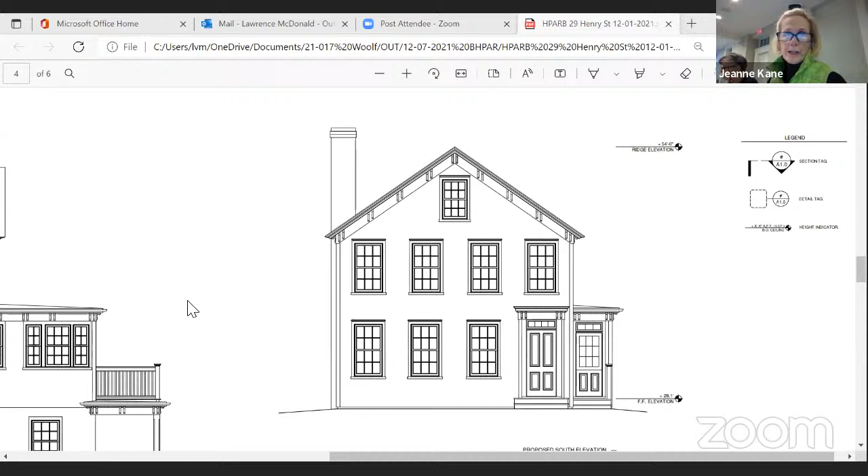Agreed, yep, it looks very nice. Thank you. So we thank you for making those changes and for working with us. If everyone feels comfortable with the changes.

I have a question. Sure, Kristen. I know that there was a different architect on this job originally. I just want to know if this job still conforms to the area variances he received from the previous architect. That's right, yes it does. Okay, great. Any other questions, anyone?

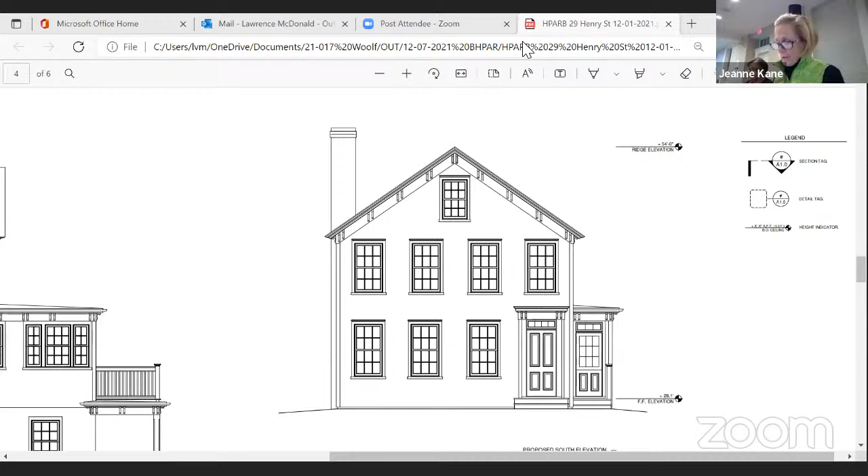So we could make a motion to approve 29 Henry Street. I'll make that motion. I'll second. All in favor? Aye. Okay, great. Thank you, Mr. Lawrence. Thank you very much.

Great, so we will continue now. If we could do 207 Main Street.

Mr. Chairman, this is Dennis Downs. Can you hear me? Yes, Dennis, we can hear you now. I think on the line also is Mr. Coy from the architect's office. So, Chris, could you just go through the changes that we made as a result of last month's meeting?

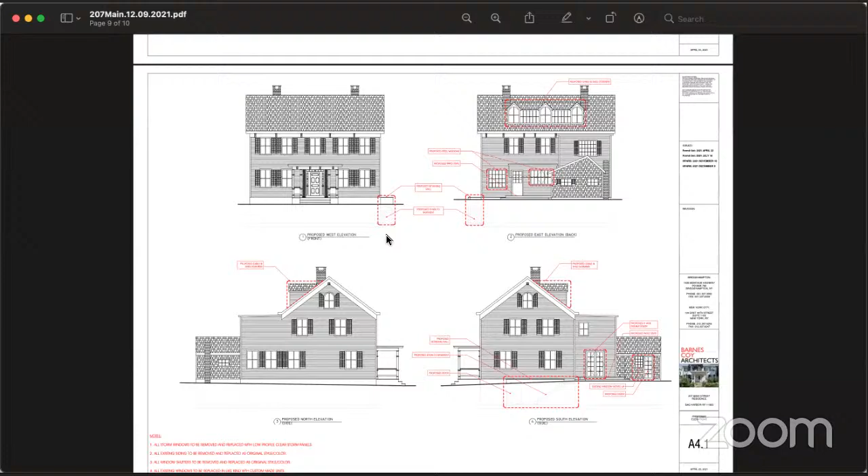Yes, of course. Good evening, this is Chris Coy, Barnes Coy Architects. We're going to put up the elevation on the screen. There was some discussion at the last hearing of the dormers on the front of the house. So you can see on the proposed west elevation, the Main Street elevation, we have removed those dormers altogether with the permission of the owner. So he's agreed to forego those dormers.

And there was some other request to draw the front door exactly as it appears. So that front door is now accurately drawn. That's the door that's there.

Then around the back, the proposed east elevation, we have a new dormer there, which is a combination of shed dormer and 3 gable dormers. That was deemed to be a little high, so we lowered it down. We not only lowered it into the roof so that the sill height is closer to the finished floor in the attic, but we lowered the height of the dormers as well. So this is the appearance now, and it's well below.

I think the discussion was that the dormer ridges of the new windows were at the same height as the main ridge, and now you can see that the dormer ridges are well below the height of the main ridge.

That should solve that. And I think those were the main comments.

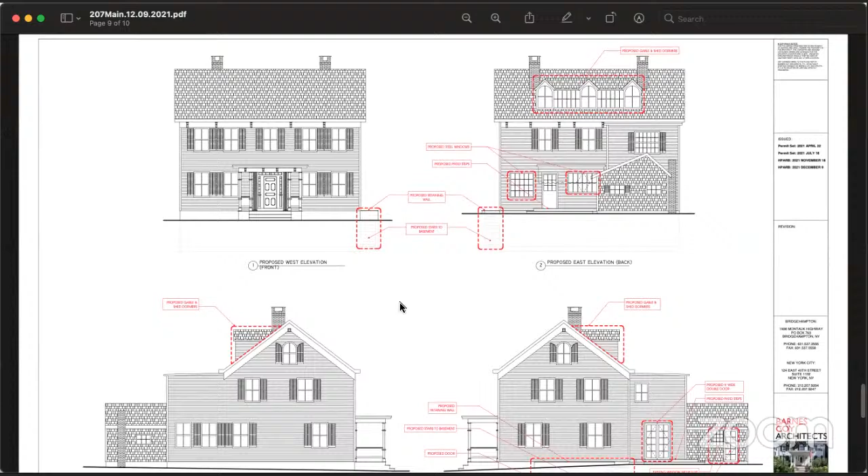Then we also were talking about the windows. Let's put up the drawing of the windows. So what we did, and you remember last time Zach was weighing in on this, we're proposing to replace all the existing windows with custom-made copies, because the existing windows are physically shot. They leak air, they rattle, they don't open and close. So we're proposing to have them rebuilt by Michael Riley Architectural Windows, and we have a representative with us tonight, Jeff Cummings.

We had the builder physically remove one of the windows, and there you see the photograph in the lower left, that's in our design studio here in Bridgehampton. So we were able to make a very accurate survey of it and measure it, and those are the drawings you see. On your left are the existing windows, elevation and section, and on your right are the proposed, which is an exact copy.

So we've already been in discussions with Michael Riley Architectural Windows through Jeff Cummings, who's on here tonight if you need to ask him any questions. This is something they do, and they're quite used to reproducing historic windows.

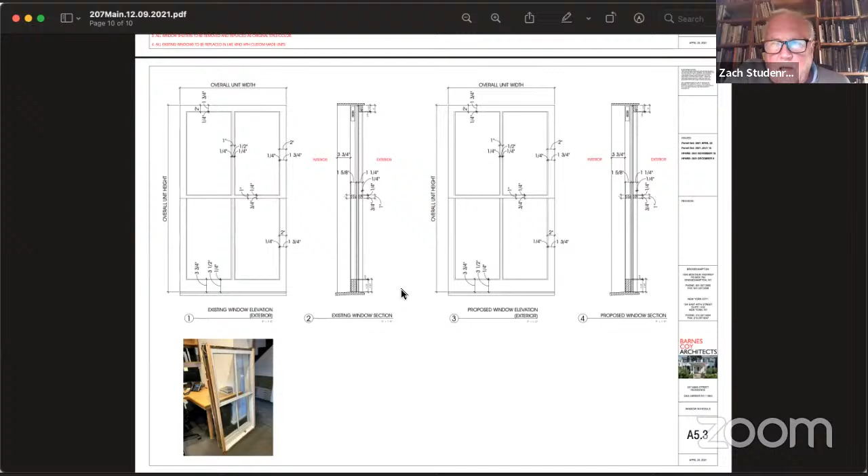I think the depth of your muntins has to be such that it will receive these insulated panels, which are certainly thicker than a single pane of glass. Yes, correct, the depth of the muntins would have to increase, but the sight line, which is shown in the elevation, would not increase. Okay.

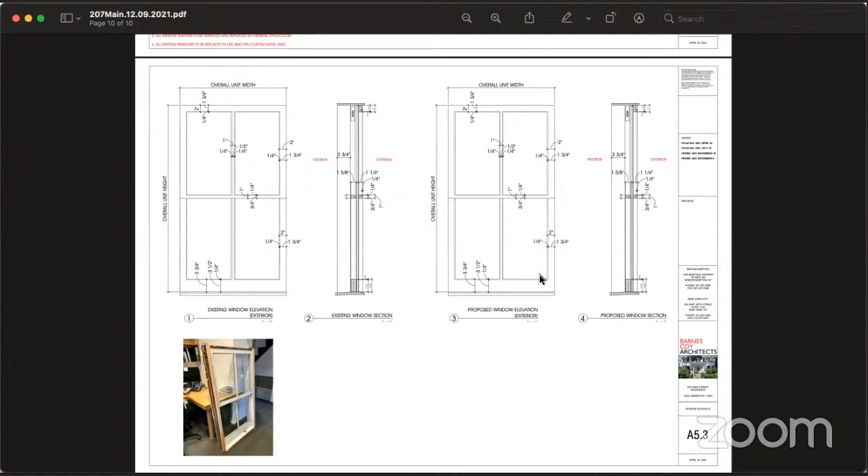Chris, I'm not sure if it would be helpful, but I do have the picture that I shared with you of the unit that we did build for the project in Nantucket. That was certainly the same historical replication of a unit. I don't know if that would be helpful for the board to see. I can certainly, should I share that? Yes, please.

I could have the sample sent to you if you needed to see it, but it's pretty large and substantial for the conversation. But at least this shows you what we do. Every unit that we build is a custom product, and we do have the flexibility to adjust these profile sizes to match existings.

I have a question. Is this modification consistent with the Secretary of Interior's directives? I think there's some area of interpretation there.

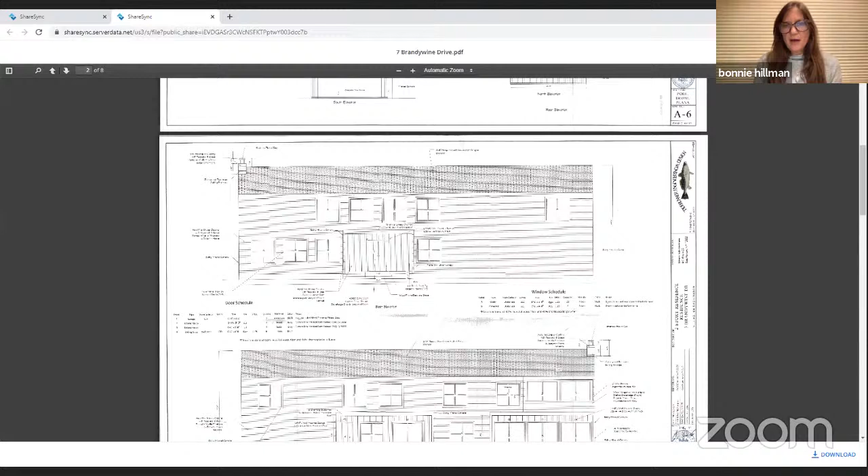You do want those areas to be vertical. Yes, around the sliding doors and around your front door and your rear door and for your pool house. Right, but for some reason this picture is not coming through on mine. I don't know if you guys can see it on yours. We can see it. Okay, so yes, so the house will be horizontal, and just inside the shadow box around the door will be vertical. Okay, and your pool house will be vertical. Yes. Okay, I just wanted to be clear on that, since that was one of the major issues that we had to address.

Yes, and then the number of windows that you're gonna have, you now know what they are. You're gonna have in the rear, or excuse me, in the front, you're gonna have 4 on the top, basically over the door, and then 1 over to the side, yes, single window. And then on the first floor, you're gonna have 3 as you are facing the door to the left and 1 on the right, and you're not gonna be adding any additional windows. This is gonna be it.

On the rear, you're going to have a total of 5 on the second floor. Were the vertical ones around the balcony added? No, those were always there—those are doors. But you added windows onto the sides of the balcony. Oh, those aren't windows, they're just openings, cutouts. Is it fixed glass? No, it's just open air. Okay, that's the clarity we needed.

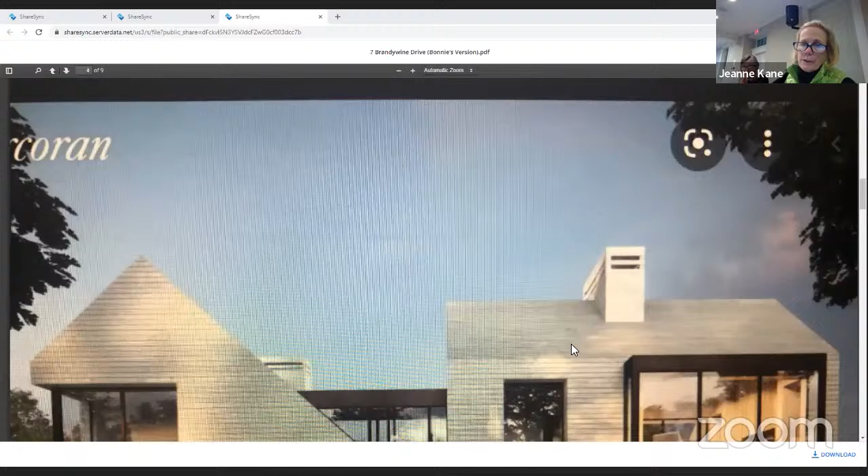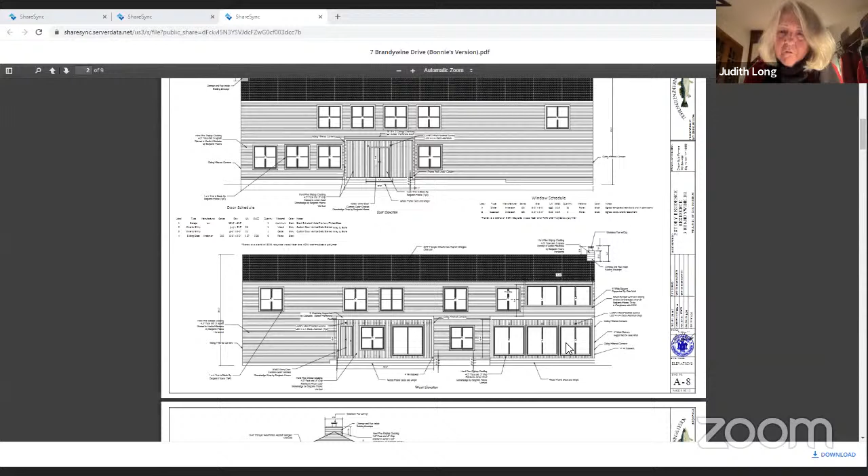So just for everyone on the board, this project had been previously approved for the house. However, when construction began, they made changes, and that's the reason for Bonnie coming back to make sure we are aware of all the changes, and that the current permit will allow her to continue work on this new proposal. Do we need to vote on this since it's a new proposal? Yes. I just want to make sure everyone understands, and if there are any other questions.

Can we see the renderings? Can you see them? I'm muted. Oh, that's not a rendering, those are just photos. Is this the actual house? No, that was just a siding color insert that you'd like—an inspiration, somebody else's house I was sort of inspired by. But it's horizontal on that inspiration house.

Yes. So this is where they are to date with the construction, the framing of the house and the cutout of the windows. This is the kind of siding, different color but the type, the shiplap. And that's the house shape—that other photo was just another inspiration house, in Bridgehampton, for the shape of it.

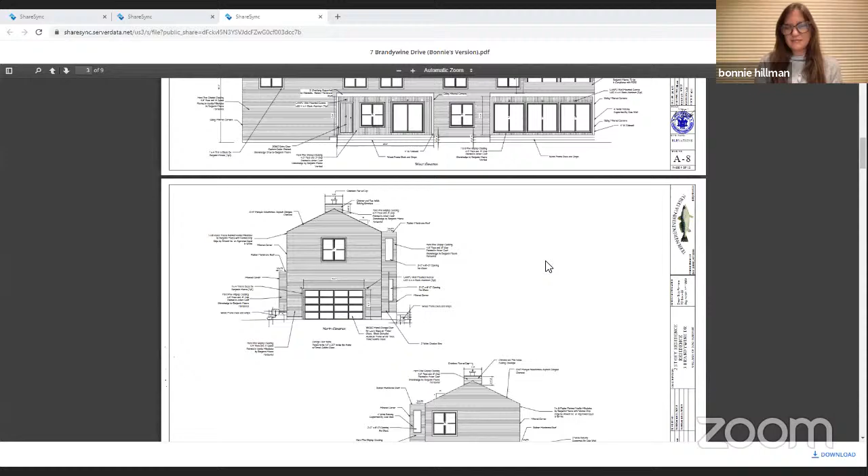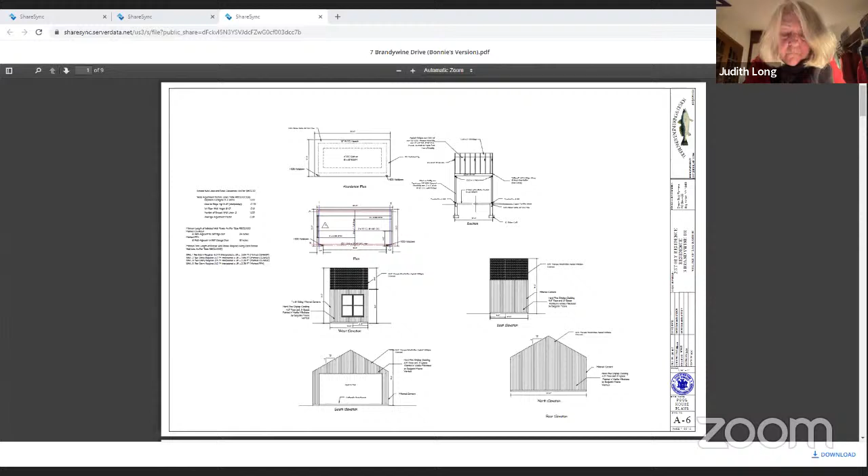I'm curious to know if there are fines involved for going ahead and doing something that's not part of the plan. The process is that a stop work order had been issued, and that is the penalty that was withheld. So now we needed fresh drawings to reflect what had been built to date and what the new proposal will look like.

And so when they went to frame the house originally—Bonnie, it's okay, we don't need to go through the detail. Okay, good. I'm comfortable.

I'd like to go ahead and make the motion for Brandywine Drive. Second. We have a second. Christian, just second, thank you. All in favor? Aye. Okay, great, thank you very much.

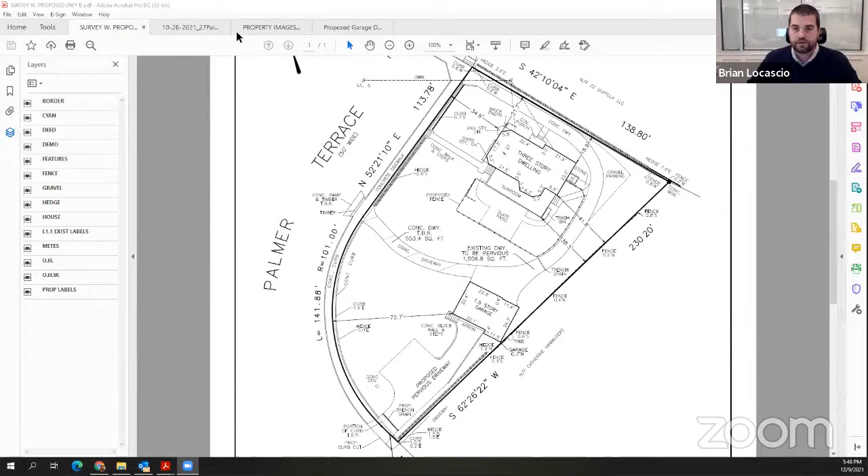And then as part of the landscape plan, there are a number of trees, and of course the hedge will be relocated, so the property is screened by large mature hedging right now. Both the existing house and garage benefit from existing certificate of occupancy. My client purchased it this past summer, and he's looking to create a new garage door, replacing the existing standard roll-up driveway door with a trifold garage door. There are a number of trees in poor health, which Matthew Horvath can speak to, that we're looking to remove, and some trees we're looking to relocate to change the landscaping of the property.

And I'm happy to take any direct questions. Otherwise, that's kind of the intent of what we're proposing here. I can show you the proposed garage door.

This is just a sample. It's not letting me zoom, but yeah, that's the garage.

So will any of the vehicles be in the garage with this door or no? Well, it's a garage, so presumably you could park vehicles in it, yes. It would be a manual door, so you'd have to open it, but it would still fully open, so cars can go in and out of the garage.

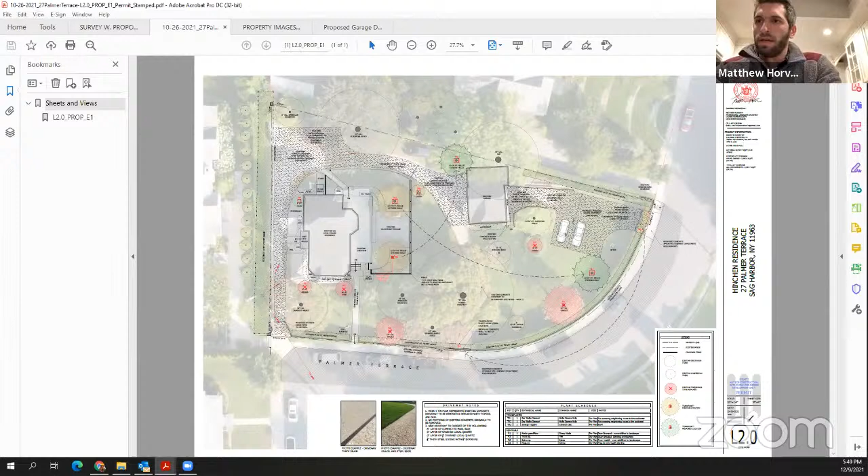Is it a double door, the existing doors? It's just a white roll-up door. I can allow Matthew to speak in more detail on that. Can I get a picture of that? I do not have a picture of that. I don't know if Matthew has one he could share. Yeah, I might have an image - it's just your standard white aluminum door, architecturally insignificant.

Let me see. You can't see it from the road at all. I had to drive all the way in to see it, because the property is heavily screened.

There it is. I don't have a great image of it, but those are the doors. The reason I'm mentioning it - it's a contributing structure in the historic district, not only the house, but the garage. I think you're documenting that in fact the doors are not only new, but probably didn't have any down there to begin with.

Hi, how are you doing? Oh, it's the background. We seem to have some competition.

But certainly the design solution for this building should be appropriate to the fact that it is a contributing structure, not just a garage on the property. That's my only point.

I think that's a fair point. So do we have an elevation of what that's going to look like with the replacement doors? No, we have not prepared an elevation. That would be helpful.

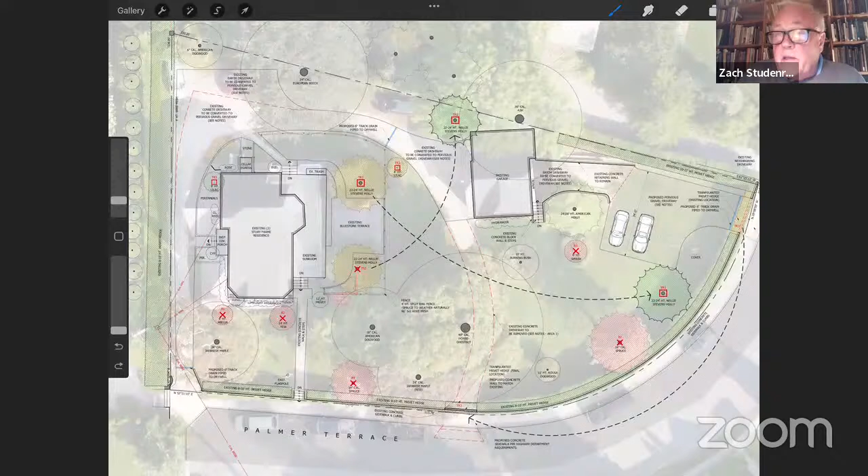I mean, there are many solutions. I don't think it's going to be controversial. I'm just suggesting that since this is a contributing building in the district, anything like this should certainly be drawn and represented so that the board can see it.

I guess it's just somewhat curious, it looks so much like a folding door to a home, given it's an accordion door as opposed to a garage door. And certainly, I appreciate if you're going to take out an aluminum door and put in a wooden door, but one that would be more in style with the garage.

Typically, it would not be a folding door, but simply two doors that are hinged, and then how they're designed in the middle, there are many design precedents you can go with. There are probably examples around the village of barn doors. This is not exactly a garage, it's a barn, with a pair of doors, which are board and batten doors, but this is a Queen Anne style building, and it's somewhat ornamental. It's got a little more design going for it than a simple solution.

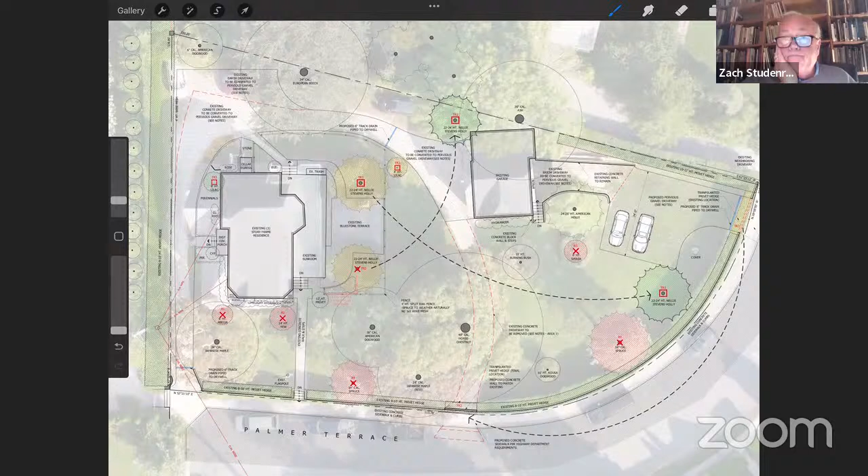And no issues with the relocation of the curb cut with the board? No, I think that's actually welcome as well from a safety standpoint. That's great, it makes a lot of sense. So I think we all agree with you on that.

Would it be possible to get those two components of this application approved tonight and table the garage door? Just procedurally so they can begin. We don't have to make that. We don't need that decision.

As far as the curb cuts, that is not a responsibility of the Architectural Review Board. We just look at it from an aesthetic point of view, how it would look. But you'll have to go to the clerk's office and they will talk to you on that.

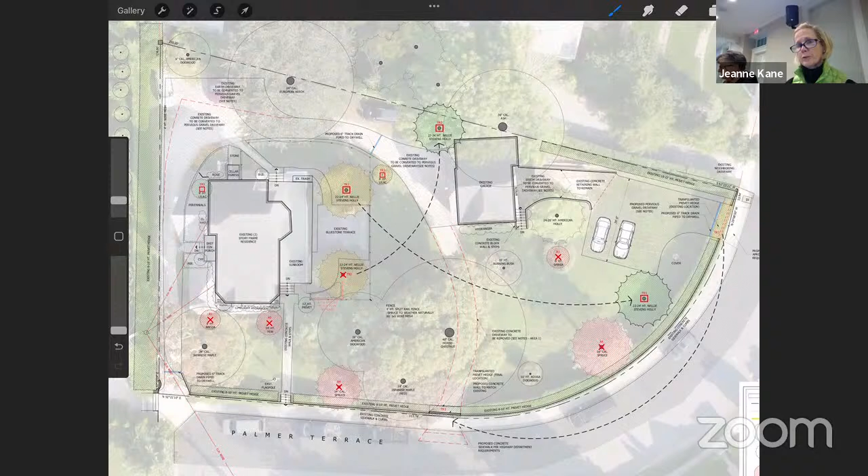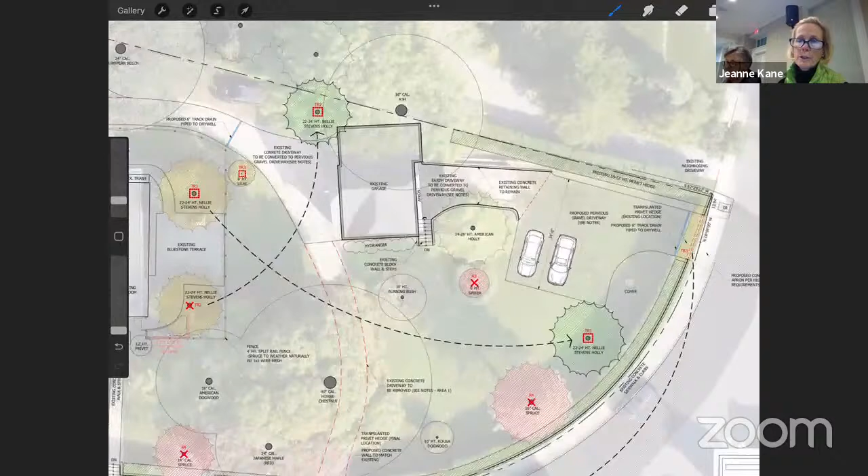And the one thing that I would just note, on where you're going to be, the new drive that you would be putting in, that we would want an apron there to lessen any pebbles that would come in to the road, because that's from a safety standpoint. That's something that we find very important for people walking or bikes.

So we would want to see that as well. Okay, so our next meeting is December 23rd. And we would look forward to any suggestions that you would have so that we could approve the whole project at that point.

Just to be clear, you're otherwise okay with this landscape plan? Yes. Okay, great, thank you. Okay, thank you, thank you.

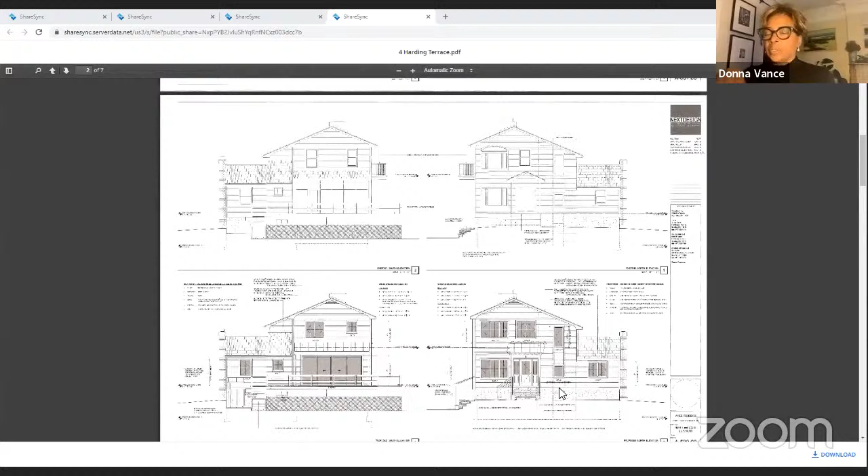So let's start with the front. There is a desire to improve the distinction of the building, so we are changing the current colonial-inspired overhang with something more updated, and replacing and repairing the stoop with bluestone. Then adding handrails, because right now the driveway has no handrails at all up to the building, and that needs to be added as well.

Understood. Certainly from a safety standpoint. And just for everyone on the board to understand, initially you were going to be coming out, and you've made changes so that you didn't need to go to the ZBA for any kind of changes. That is correct.

So as you're facing the front of the building, you can see how one window's wide and one window's narrow. On the facing right side, there are some windows you can't even reach from the inside, it's a stairwell. So we think what we want to do there is an improvement. Each of these windows would be the same type, where today, out of all those windows, there are 4 different kinds.

Also in the front, where today the stoop entrance is leaning in one direction and not the other, I have an issue with balance. So what we're going to do is notch that out so one way is straight ahead, and if you're coming from the driveway it's also straight ahead, linear, and balanced. There'd be a cutout there where today it's one piece, adjusted so there could be some distinctive planter or something on the side.

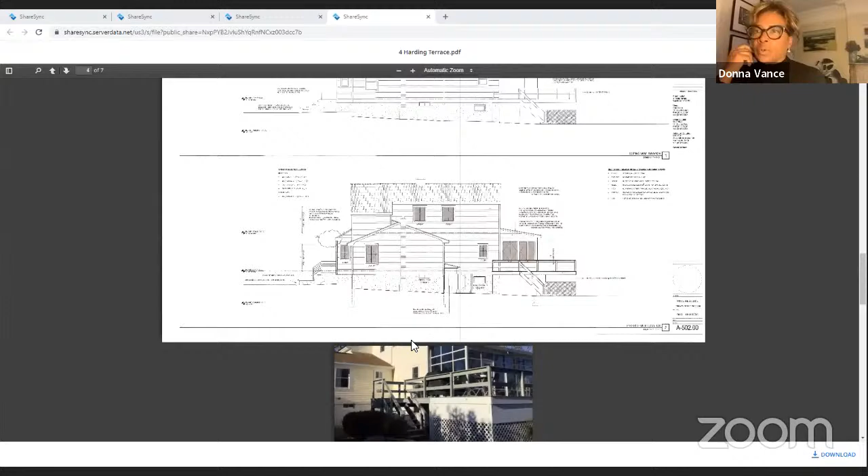The other thing I intend to do is paint the house away from the butter yellow you're seeing. The windows would be replaced with darker framing and more analogous colors, a deeper gray. There is a version of the house not in the photos but in the other drawings, a rendering, I think at the top.

All the way through it. I know, I saw it. I don't see it in the scans. Well, these photos I just sent over a little while ago today. Okay, those are just the surveys and the plans. But there was, there it is, it's in your original plans before you made the changes. That's why. Right. Yeah, they look great.

So Ms. Vance, while we're on the front elevation photo, somehow I know the house, but seeing it in this perspective, I'm a little lost about the two windows on the lower right-hand side. Are you going to standardize, is your suggestion to standardize those in some way?

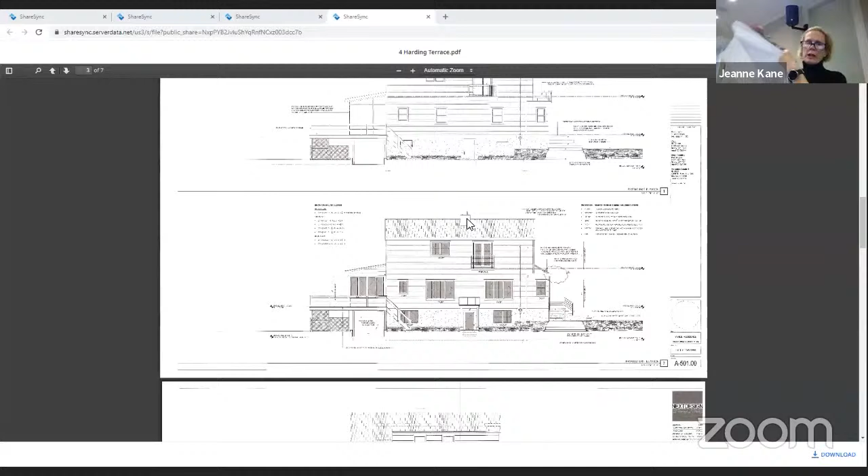Yes, the original plans with the wrong overhang actually have a rendering that shows this, though I know you can't see it well. The objective would be, can you see this at all? Hold on, I'm going to try and hold it up. Can you see it at all? Yes, they can see that. Right, nope, can't see it. Are you looking at Donna Vance's? I'm holding it up in my hand on my phone.

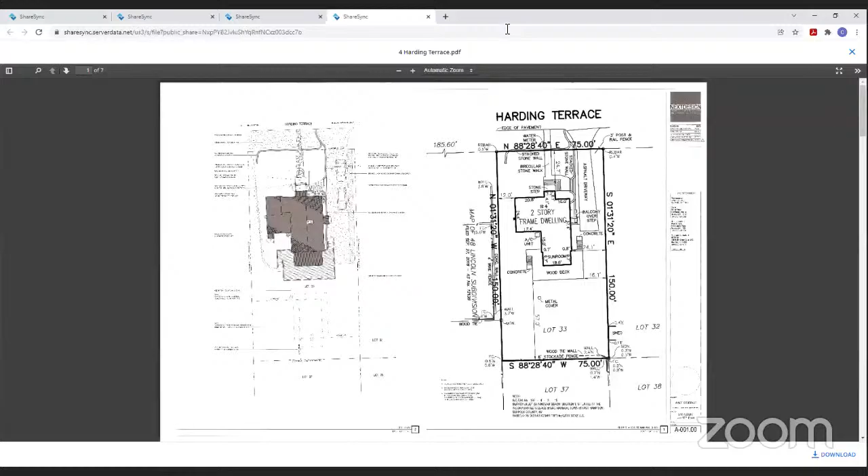I'll stop sharing, and then there you go, there it is, oh, someone's holding it up, Jeanne Kane is holding it up. So this is the old rendering that has the overhang that is now going to be recessed back to where it needs to be for the house. But what I'm trying, Mr...

Williams asked a question about the windows on the other side of the house. So I want to show that they're all going to be standardized to be the same, whether you're looking at the side, the front, or the other side and rear, so that they are balanced, squared off, no archways. That is the objective.

One follow-up question: will the actual window opening sizes be altered or increased? Yes, they will be. They'll be increased in the front. For example, this bay window here does get wider.

And on the sides of the house, we are adding windows, because the windows there are very diminished in terms of scale. So it will open up the ability to see out the window. We're adding windows on the side. Looking at this one, this is the side of the house and that's the basement, so there would be an additional window there and another one there. So there'd be two, where today there's one.

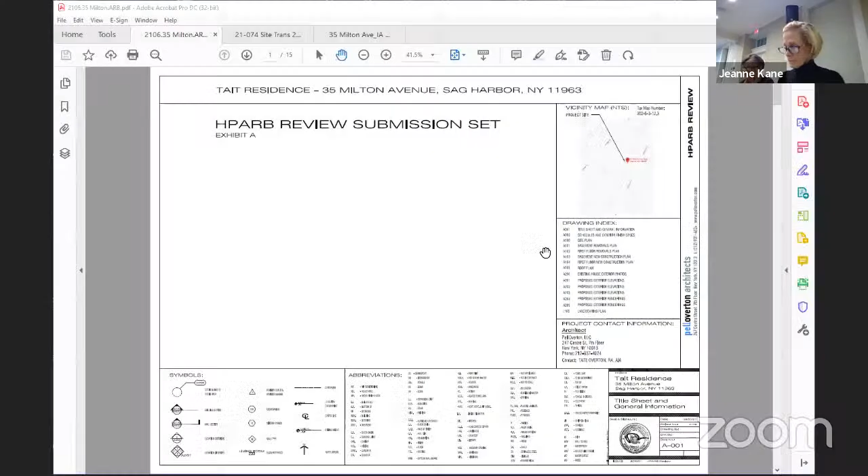Okay, so this project is a renovation of an existing one-story frame house. We are making an addition to the house, as well as doing pretty much a gut renovation of the interior and recladding the exterior. We're also adding a detached garage on the rear side lot, and we're landscaping and putting in a new recessed gunite pool in the rear yard.

I'll show you some photos of the existing house. Number 3 here is the front facade of the house, existing as one story with a side appendage.

From the north end, there's that appendage off the side, sort of a sunroom. The rear driveway is existing, and the rear yard, a detail of that a little closer to give you a picture.

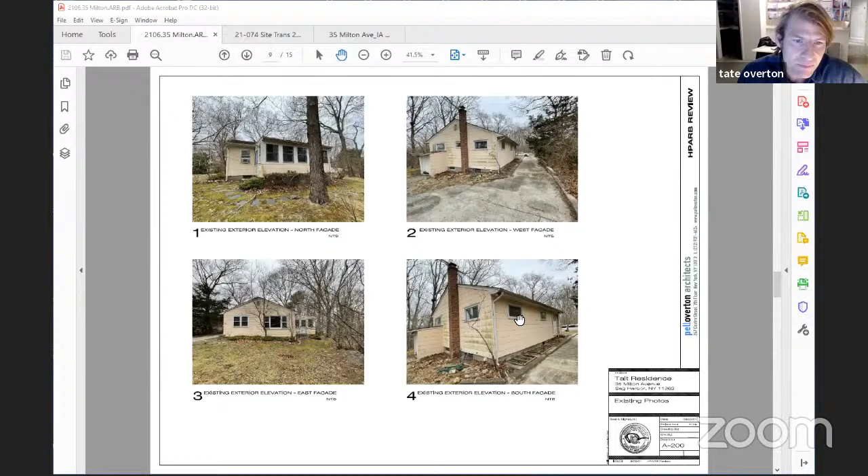I'll walk you through the plan quickly. The existing house basically follows this rectangle shape, and our addition pops out towards the north end of the site.

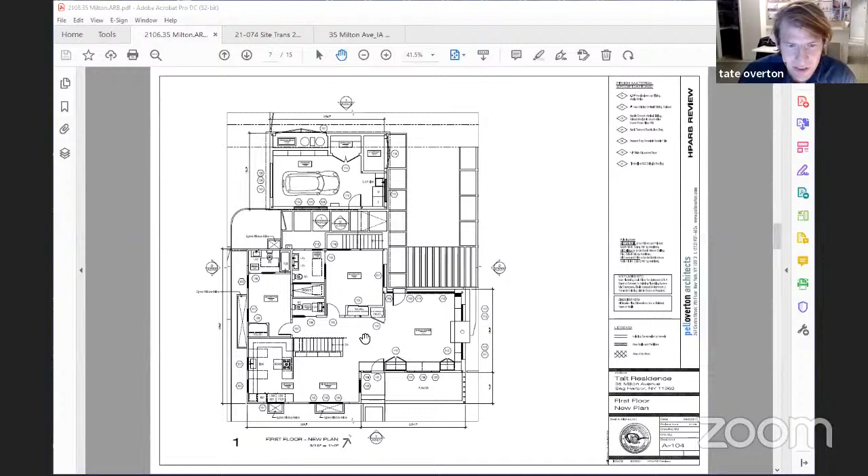We're maintaining the existing number of bedrooms. We're not going for any variances on this property or this project. It's all as of right in terms of setbacks and sky plane, etc. We're also staying within the allowable lot coverage and gross square footage. So this is just a renovation all within right.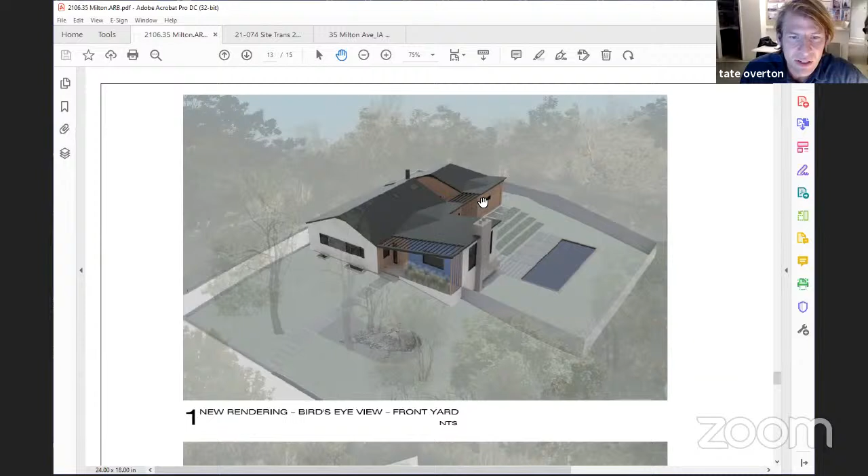Proposing a white HardiePlank horizontal siding - that's what you see as white, and it wraps around. This is that vertical natural wood siding that's at the entry and in the back areas. The pool grading.

This is looking bird's eye view from the northwest corner. The garage is like a little mini-me of the house, clad with this vertical wood, natural wood finish. We have a fireplace that we're proposing.

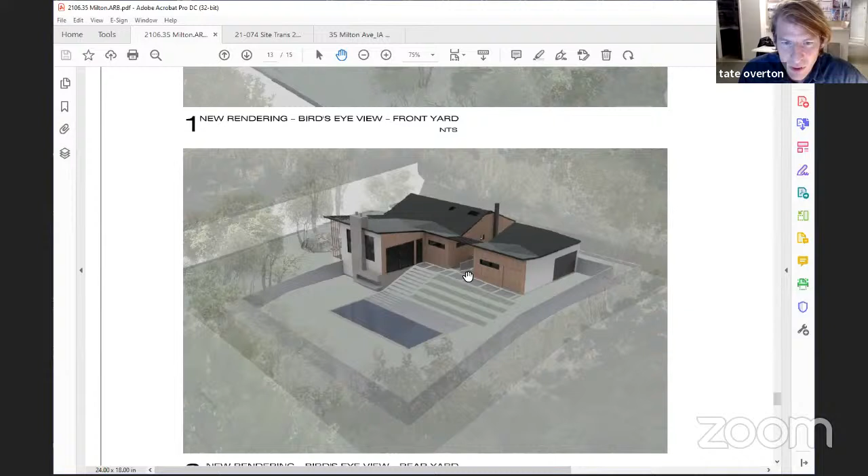I failed to mention, but there's a fireplace in a new living room area that drops down to become an exterior fireplace, so there could be a nice little zone there. We're really trying to maximize all the possible activities that can happen on this lot. Pool's here.

We jump back to this view - this is a street view, as we're coming driving up Milton Avenue. There's a grade to Milton Avenue here, so we're not quite to the top of the hill, but this is a front facade looking from the northeast.

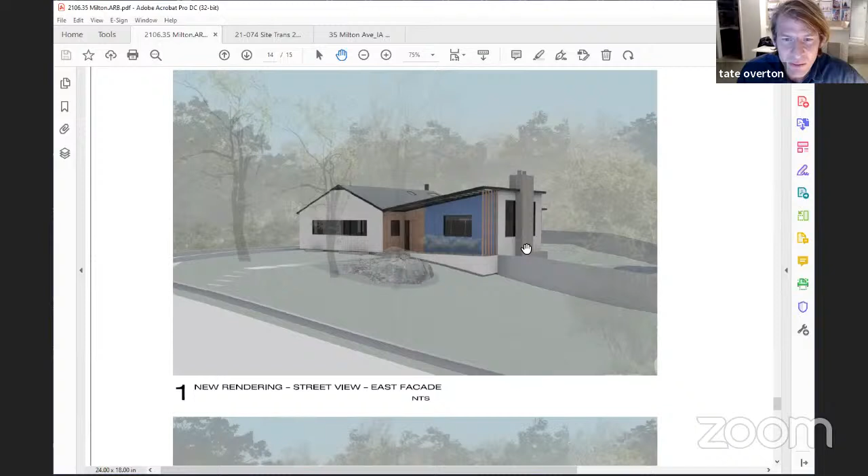So our boulder, and then we're having this little punch of color at the front facade - we just thought it'd be a nice gesture to make the house feel welcoming and fun. And then the horizontal white siding, vertical siding again, that brise-soleil piece, the fireplace, chimney dropping down, and the fencing.

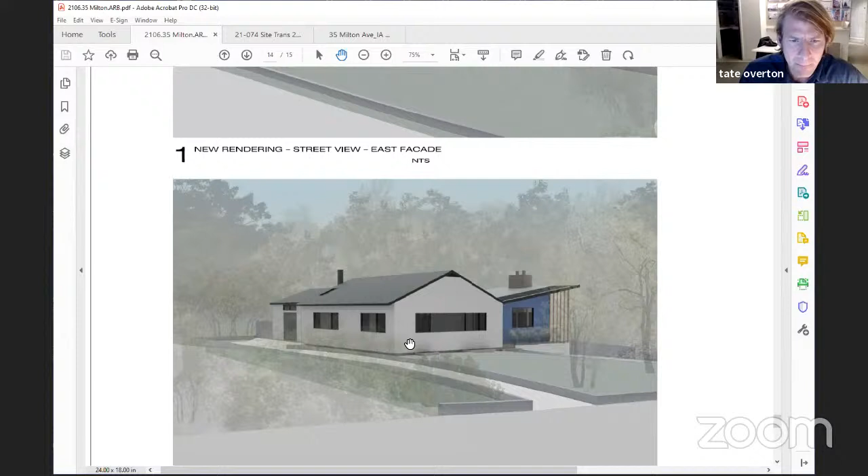This is the opposite view, as though you're going down the hill of Milton Avenue. The driveway, which we're keeping, but we're most likely going to turn it permeable versus the existing concrete, which is not so great. So horizontal white siding on that front elevation.

Any questions so far, or shall I just keep going and you guys can jump in? Maybe we'll pause just to see if there's any issues with the house before we go into the landscaping.

I would say I very much appreciate the renderings, because with all the horizontal and vertical elements it was looking a little busy in the drawings, between the fence and everything. But when you see how you're using the white Hardie board along with the natural cedar and the differences between them, it makes it a lot warmer and you understand what you're trying to accomplish. So appreciate that.

And also the fact that you're trying to follow the roof line and keep it consistent with the existing. Any questions, Christian? And obviously it's not a large piece of property, so you're trying to maximize what you have with the shape of the property line as well. Right.

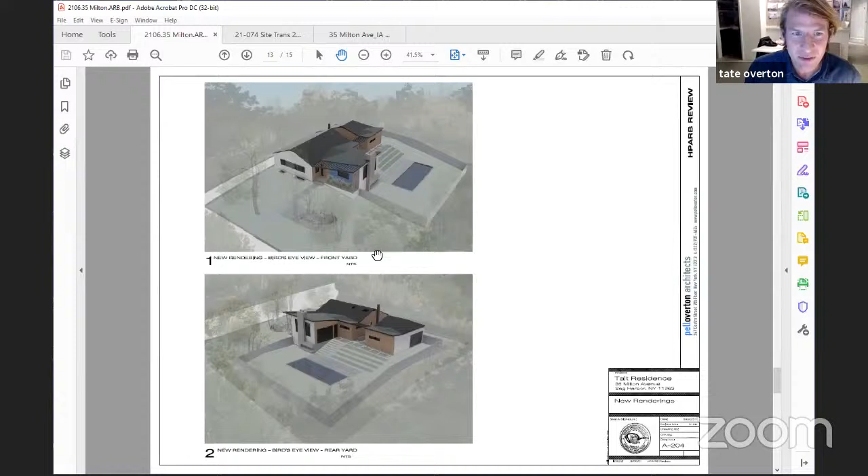I can speak to more detail about the finishes, but you seem to so far understand what we're trying to do, and I appreciate that you picked up on the busyness. It's really a specific intention of making the more private areas a warmer material, although the white HardiePlank is of course not cold. I should outline the windows though, we're trying to make it a singular gesture.

So we have a window here and a larger window here, and then we have a gray panel that fuses the windows and the frames. The windows and frames are painted out in black, then we have a gray panel that connects them so that we don't have a series of punctures into the house, just one kind of gesture. That was a design move I wanted to call attention to.

Oh yeah, actually we picked up on that. We thought it was just one big window. Yeah, that's the idea, we want it to read like that, but it's just not a huge window.

So Tate, my comment thus far is that, as usual, you've done great work, and your concept is solid and attractive, and it's an update that is consistent with what's going on in neighboring properties that we've approved recently.

I am interested in the landscape plan, so when you get to that, I'd be very interested in terms of what you're going to do in addition to the fence to create some privacy around the pool. Very well, thanks Steve.

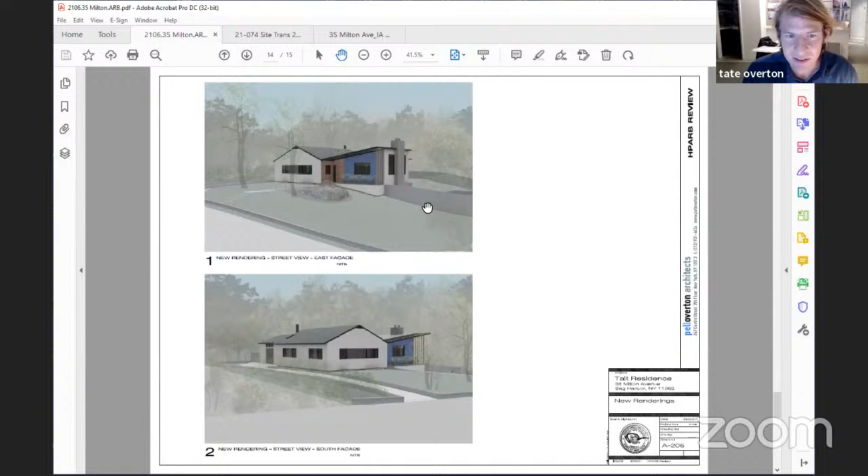I can jump into that unless there's any other immediate questions. I think we can proceed. Okay great, so I should clarify that we are removing several trees, so we're trying to replace them.

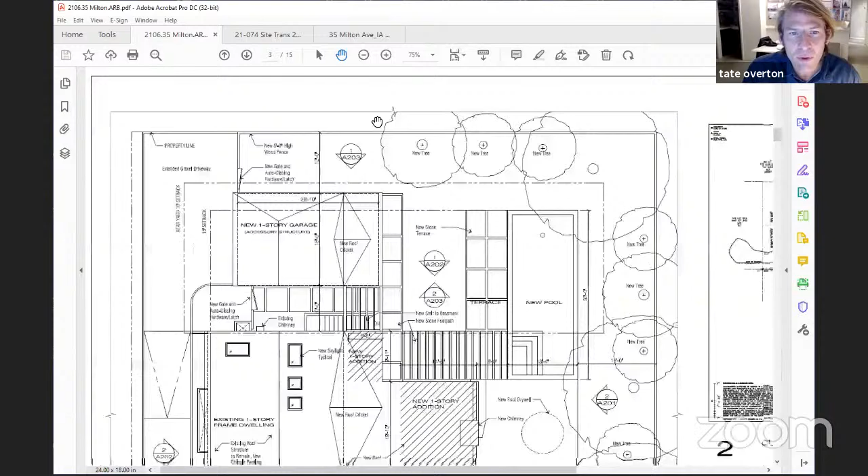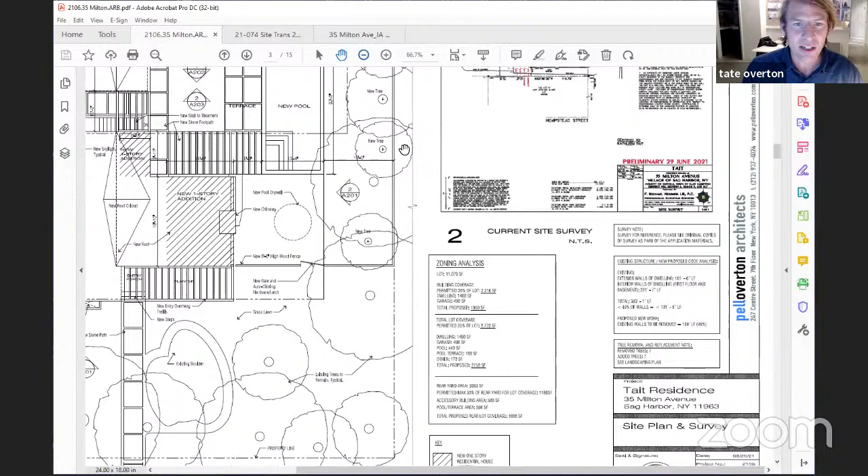Let me actually go back to that, just so I'm completely transparent with you. Where you see new trees, I think it's a count of 7. We're removing 7 trees to make the addition and the pool area, and to manage the landscape and not kill the trees because of new footing and new landscaping. So we're proposing 7 new trees plus a lot of other stuff. But that was an indication of what we're doing with the trees.

Just diagrammatically, you can see 3 new trees here, 3 new trees here, and a tree there. The illustrative plan will hopefully make it at least look more pretty.

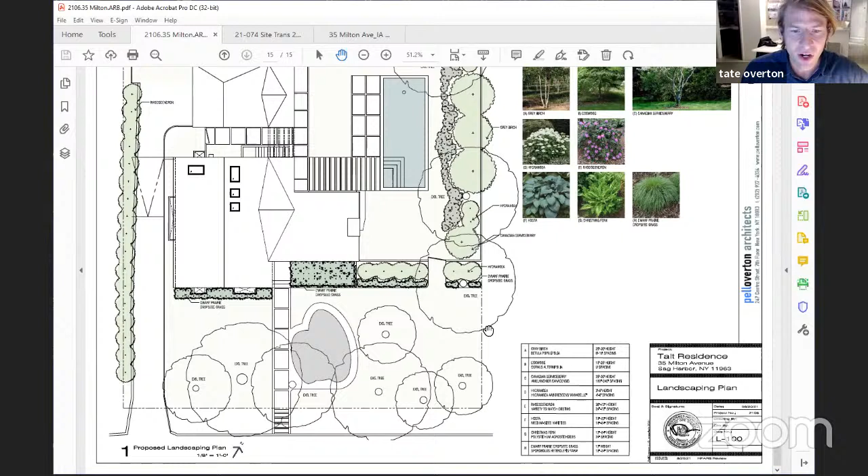Also, I need to clarify this is not due to the enlargement of the house, because we're not enlarging the house greater than 25%, but we are doing a new septic system. It's a new I/A system that has been designed and is in the process of being approved. We should be approved very soon. It's happening in the front yard, so some of the trees are being removed for that.

But that is also happening on this scope. So what we're planning on doing is keeping whatever large mature trees we have around the perimeter, and then we have a gray birch proposed along this edge for the neighboring property, hydrangeas as well, and this serviceberry, Canadian serviceberry. These are all flowering trees that grow, they vary, but roughly 20 to 30 feet high.

And then a dogwood tree is proposed back here in this corner, and then some low growth plantings around, and also some lower growth plantings along here. And then there's existing rhododendron along here, although it's not really helping in providing privacy for the pool. But that's what we're proposing for the privacy along the fence line for the pool.

Is the fence that's surrounding the pool going all the way over to the property line? It is, I mean, up to a comfortable point of the property line where there's, right, just inside the property line, correct.

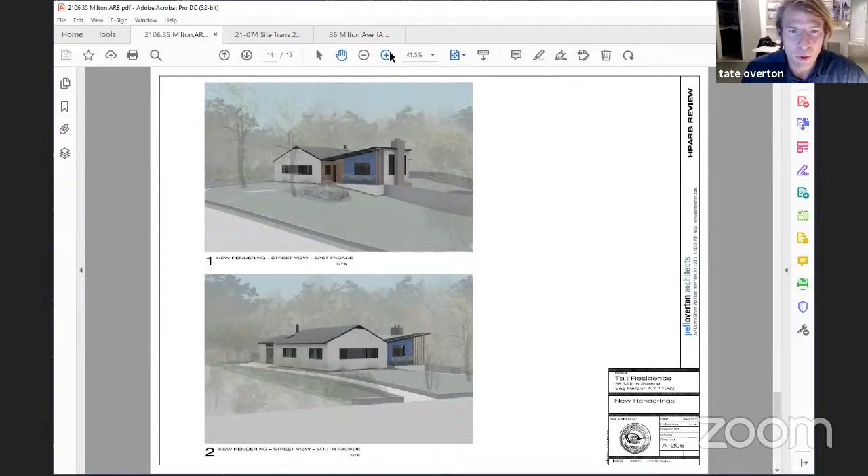Our rendering doesn't really... it's kind of vague, but it would gray out because it's cedar, so it turned gray, but it's horizontal. We'd like it to play off the horizontal siding, which is why we went with horizontal fencing. It just feels like the fence should reflect the landscape, which is horizontal, so it helps the eye read the fence, less obtrusive to the landscape.

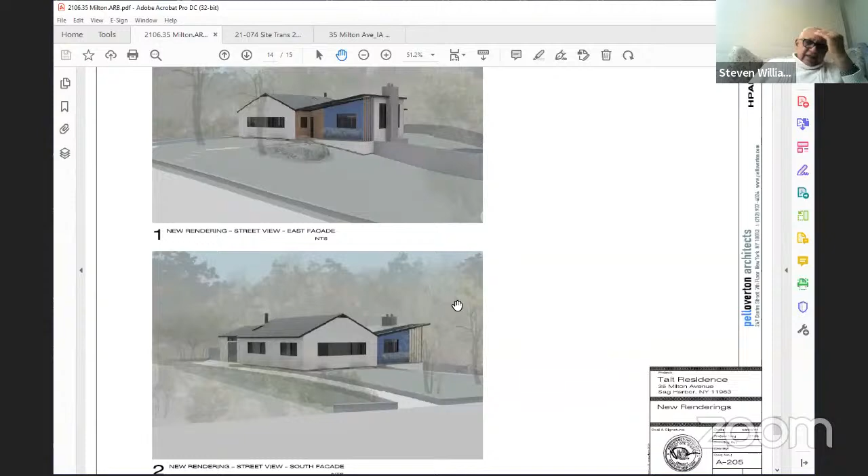So, as I said, I think it's nice. My only concern is a lot of people in our neighborhood are concerned about acoustics in terms of swimming pools in particular, because they generate outdoor music and laughter and conversation, which is great.

Is there any consideration, since you mentioned the neighbor was pretty close, maybe to making that rear yard fence - not the side yards, but the rear yard fence - maybe taller somehow? But I think 6 feet is the max that we can do. Yeah, six is the max.

But Steve, one clarification I forgot to mention - Kathleen Tait owns the rear yard property. Oh that's right. I'm thinking, okay, and I don't think she's planning on selling it - it's an investment for her family in the long term. So I'm not too worried about the rear yard, although your point is well taken for the side yard. But again, we are looking to try to plant this up as much as possible.

Also, the side of the house, the orientation of the adjacent house is sort of like - I don't know if you can read it, it's not that close, but hold on, let me just try to do this again. I'm more concerned about the neighbor downhill.

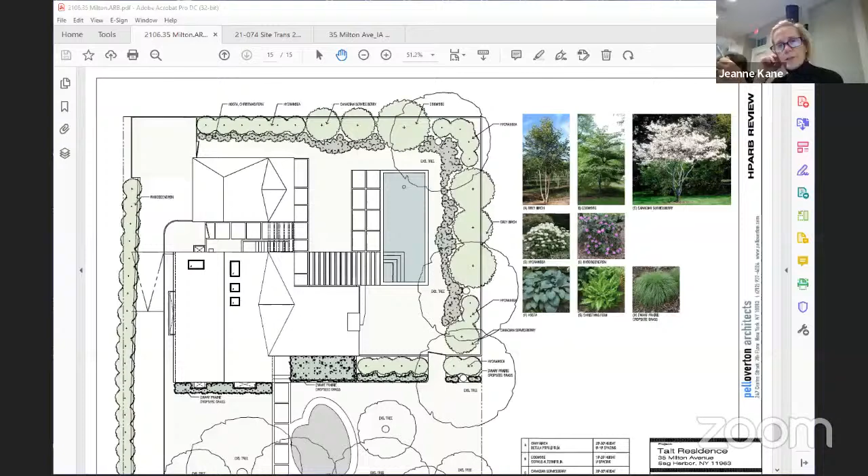I think we have to not necessarily go through who the exact neighbor is, but just make sure there's privacy, and I appreciate that we don't want loud noises going back and forth between different neighbors, but hopefully they'll be respectful. If the 6-foot fence, which I believe is the maximum allowed, as well as what could be 12 to 15 feet, and then as the trees mature, that would bring more privacy, certainly during seasons when people would be using the pool. Correct. So Madam Chair, I'm going to withdraw my comments based on your direction.

And I don't have any problems with it. I was asking neighbors' names only because I know who has a pool and who doesn't - so if you have two neighbors with a pool, it's all fair play. That was my only thought. Besides that, I support the project, just to be clear.

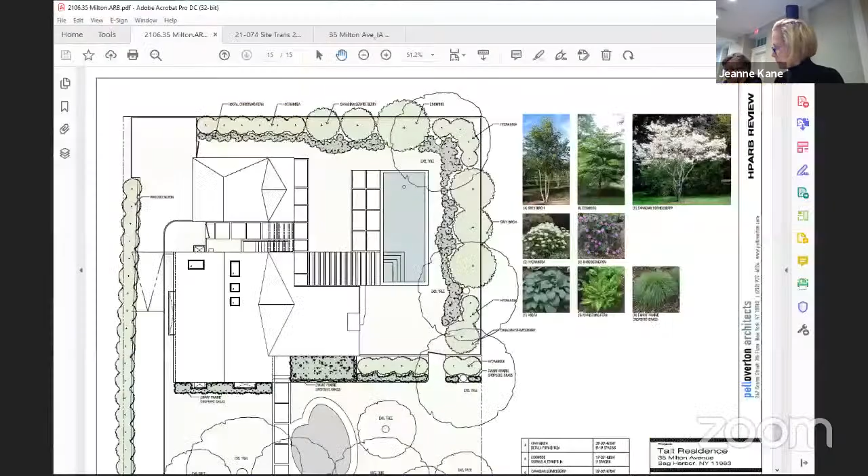So if we want to make a motion? Yeah, I'll make a motion. 33 Milton Avenue. I'll second, as presented. All in favor? Aye. I think it's 35 Milton. It goes by both, as a... oh, it's both lots, really? Oh okay, I think because she owns the two lots, but I believe this is 33. Yeah, okay, it is, by, on the record.

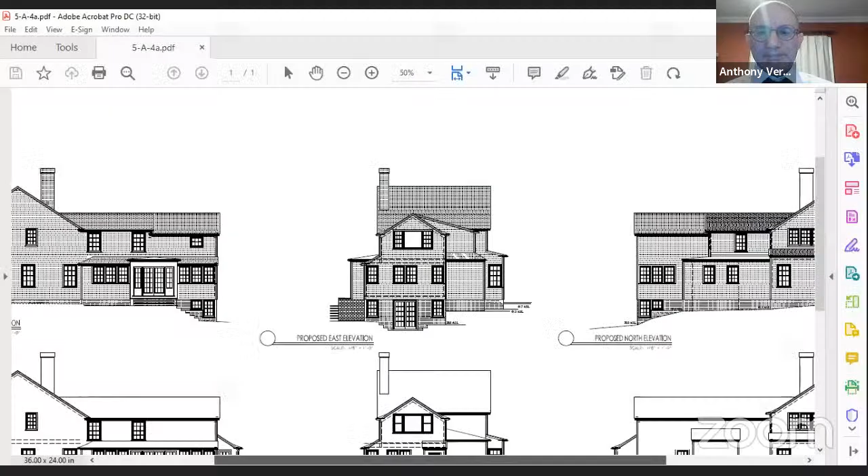So these are the comparative elevations. On the side here, this is existing, this is proposed. You can see where we're just taking this existing door, popping it out 3 feet. This is the little bit bumping this roof up 1 foot to create the shed dormer.

Then on the other side, we've got the first bump out, which you can kind of see from the street, and the second bump out behind it. The idea here is to fill in this gap of the second bump out and add a small second story to it, which does not come out to the facade of the first floor.

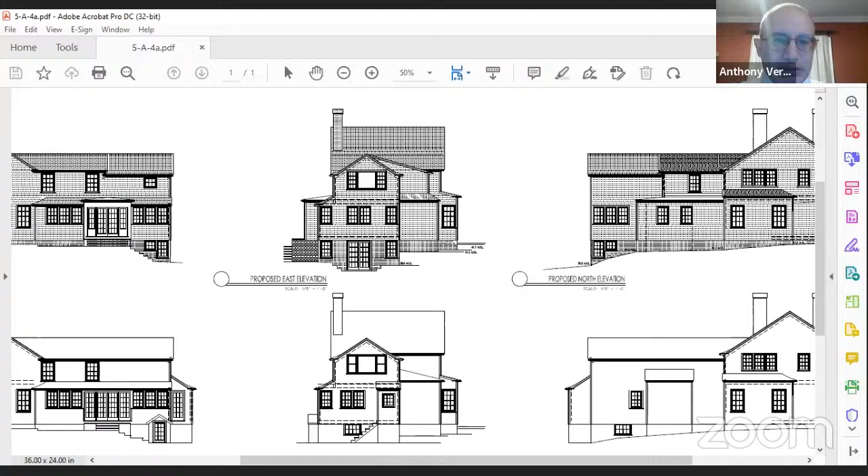And then the rear facade, once again, existing, proposed. So here is the shed coming off of this addition. This is the existing bump out, the second bump out behind it. Then kind of cleaning up this back facade a little bit, French doors coming out from the basement, a couple of extra windows there. All right, so let me go into the floor plans.

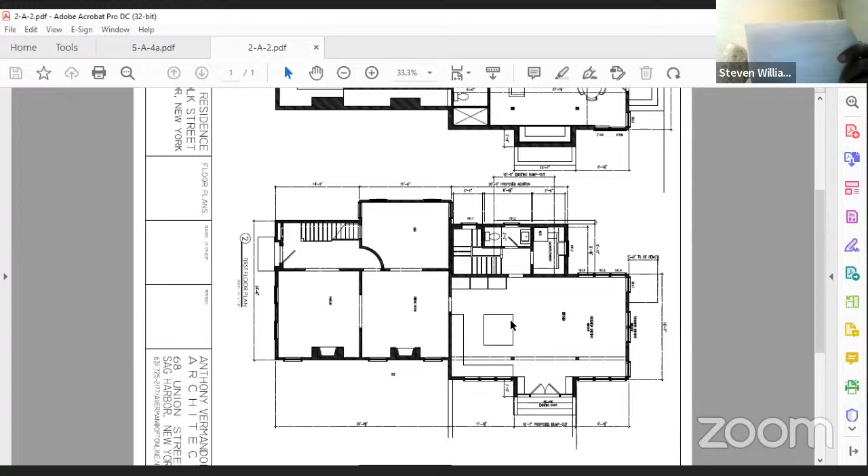Okay, great, so can we make a motion? So moved. I move that we approve the expansion plans as presented by Anthony. I'm looking for the address - is it 39 Suffolk? 39 Suffolk.

Without comment, I'll second. All in favor? Aye. Great, approved. And thanks, Anthony, for the great work. Okay, thank you.

Okay, great. 160 Suffolk Street. Okay, that's me as well, Anthony Vermandois. If you could just give me a moment here to get switched over to the files.

Well, we'll do the same. All right, I'm ready if you are. Yes, sir. Okay, all righty. So I'm going to screen share.

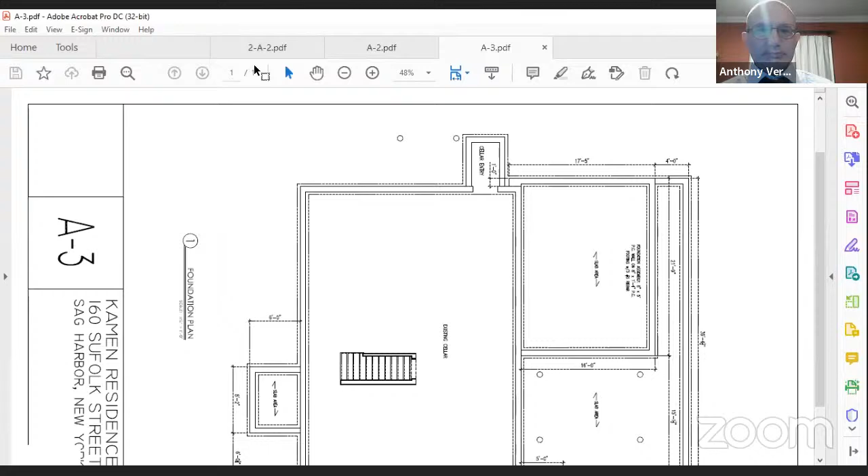So if we go to the floor plan, once again I'm going to have to stop screen sharing here to get to the actual screen I want to share. Okay, so here we go. That's not right. Okay.

Okay, yes. So really the only changes here are to the first floor. This is the existing house here, just a simple rectangle. We're adding a master bedroom addition here to the side and a sunroom addition here to the rear.

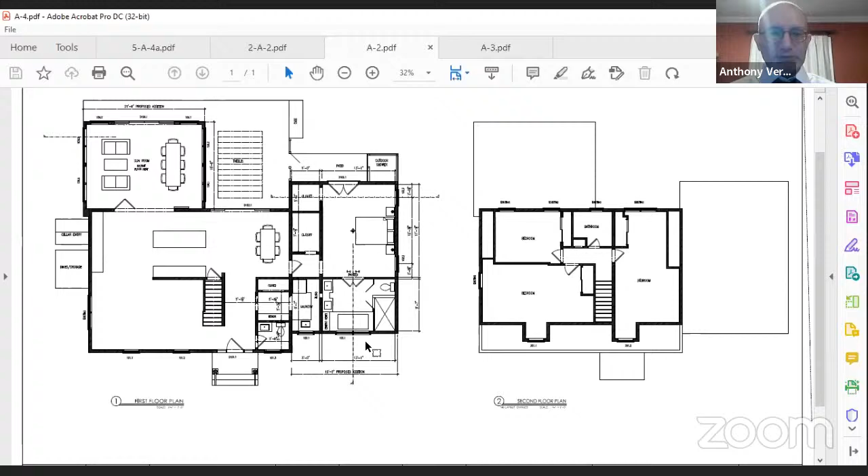To the elevations now. Okay, so here's the front facade. We are going to replace the windows with 6/6 windows. These windows in the living room are a little squatty looking, so we're going to make them a little bit longer, adding a window here to the other side, and then here's the master bedroom addition. Ridge height will be slightly lower than the main ridge height. These two dormers are existing.

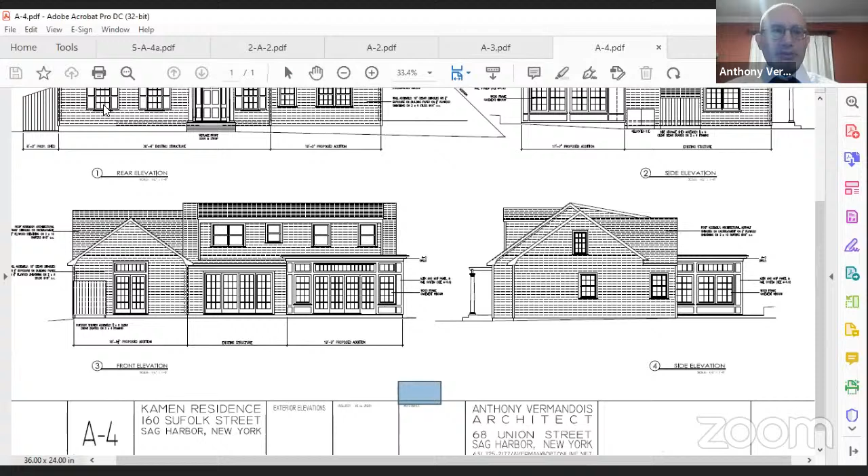Let's see here. I think... that's weird, try something different here. Let's try to zoom out here.

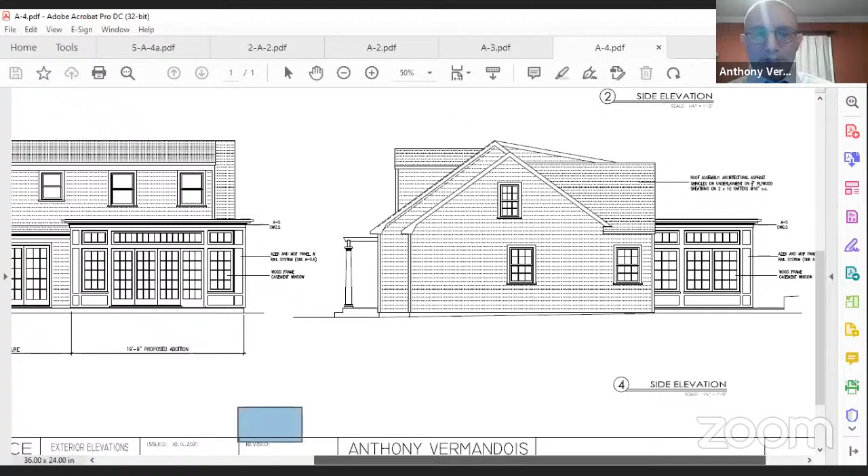Okay, there we go. All right, so here's the master bedroom addition. That's the main existing ridge. Here's the ridge of the addition. You can see the sunroom poking out in the back there. Here's the rear facade. This big shed dormer is existing.

Here's the sunroom addition, a new set of doors that we're doing off to the backyard. Here's the master bedroom addition. Just the roof line is basically a gable and then a slightly smaller cross gable going into it from the back, just to make all the roof lines work. Little outdoor shower thing here.

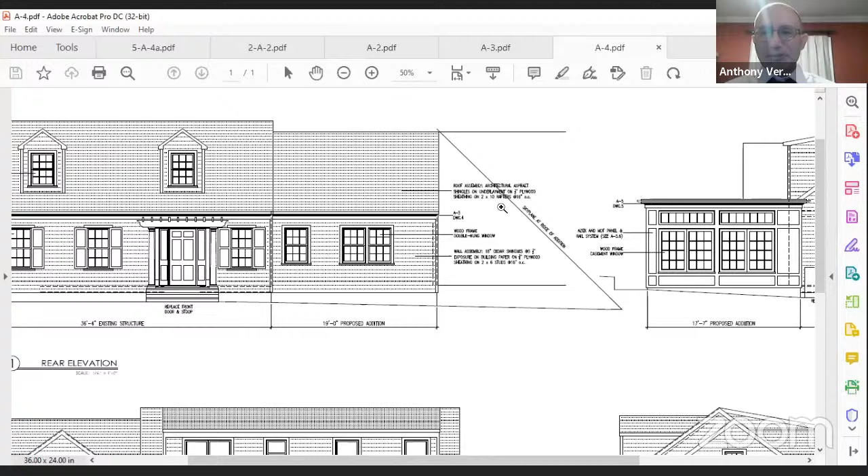And the other side here, so here's the sunroom addition and a little bike shed we're going to add to the side. We're good with all setbacks and pyramid law. Here's the pyramid - the only place where it even came close was here, but we just had enough room to clear it, so I didn't have to do one of those funny hip things in the roof. And that's really it.

Looks like a nice addition to the existing house.

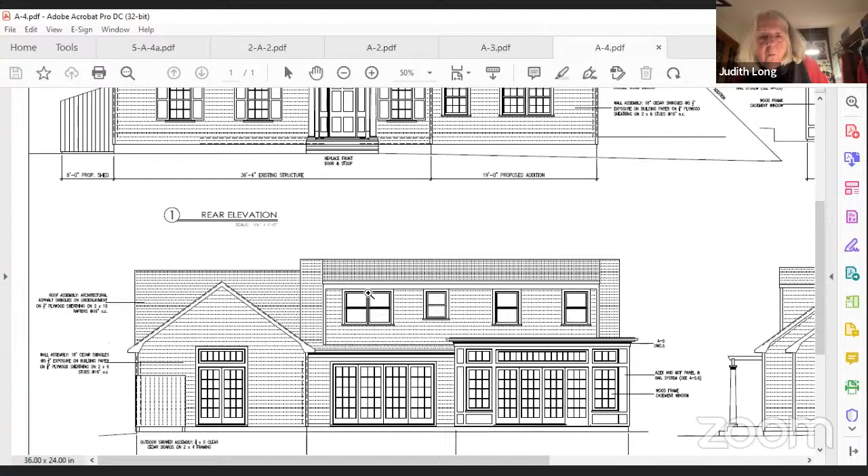I have a question - if you could scroll down slightly to the next one. You have 1/1 windows up above, and then these very lots and lots and lots of little panes on the bottom. It almost seems as if you could have fewer panes maybe down below. Well, I think what happened here is these are actually the existing windows, which are 1/1. At this point the plan was not to change them, but if the budget allows for it, I think we would just replace these windows with 6/6, like what we're proposing for the front. Yeah, that'll make it match up nicely. Okay, it is the back of the house, so.

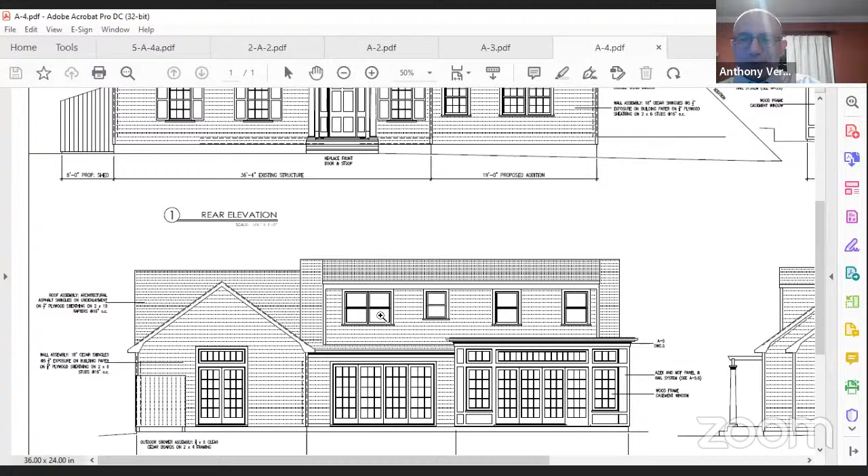If, when you're standing there, you don't really see that shed dormer because of perspective, so it's not really as in your face as it looks in the 2D elevation. But once again, if the budget's okay - and I think it will be, because it's just 4 windows - we'll probably replace those 2.

It's a nice job. So just my question, Anthony, the write-up is a little confusing. So the existing shed dormers in the back, those are existing? That's my question - are those?

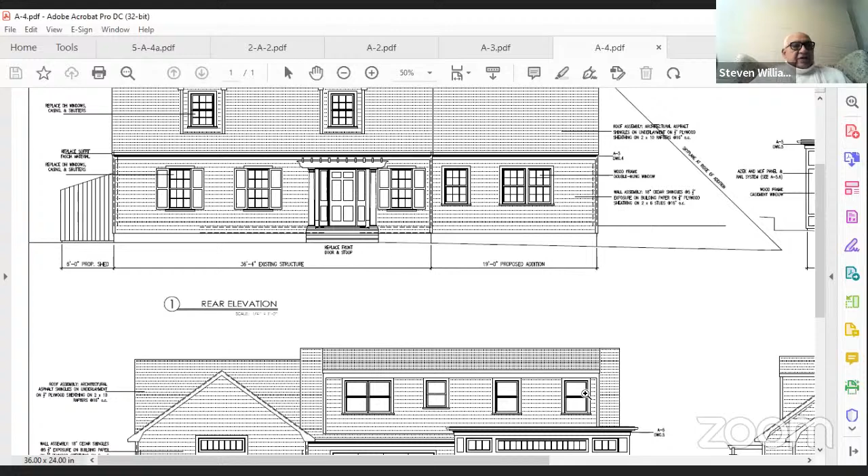Yes, this shed dormer is existing. The little dormers in the front are existing too, but we are definitely changing the windows - now they're 1/1, so we're changing those to 6/6. Also I noticed you have 3 windows with shutters and the rest don't. It might be less cluttered if you took the shutters off, but they're existing. Just an idea. Yeah, I know.

Okay, I think this is a nicely done job on a smaller house, and you're gonna add some nice living space for them. I'll make a motion to pass 160 Suffolk Street. I'll second. All in favor? Aye. Aye. Okay, great, thank you very much.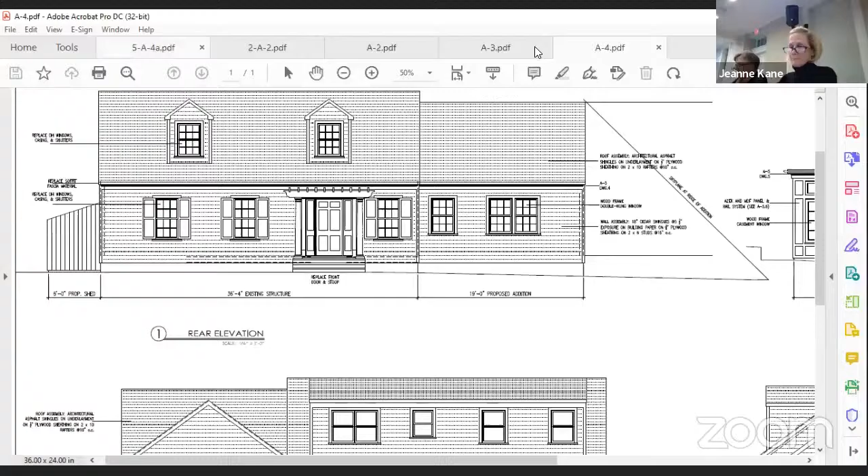Yes, oh that's me. Okay, great, now 64 Hillside Drive West.

Oh, it's Dennis. You need to unmute, Dennis. There we go. Am I unmuted? Yes. Okay, so you've looked at this application before.

The only thing I need is somewhat of a consensus that I'm okay with the slight addition that they're making to the back of the house. It's like an L-shape. The back portion of the house goes out on one side of the back door and goes straight back, and that's going to require a variance.

So are you treating this like a discussion item? I don't know, I think they put me on as new business, but I think I'm still waiting for the ZBA. I'm going to need a rear yard variance because the extension they're proposing goes into the rear yard. Is this a corner lot property? No, it's an interior lot.

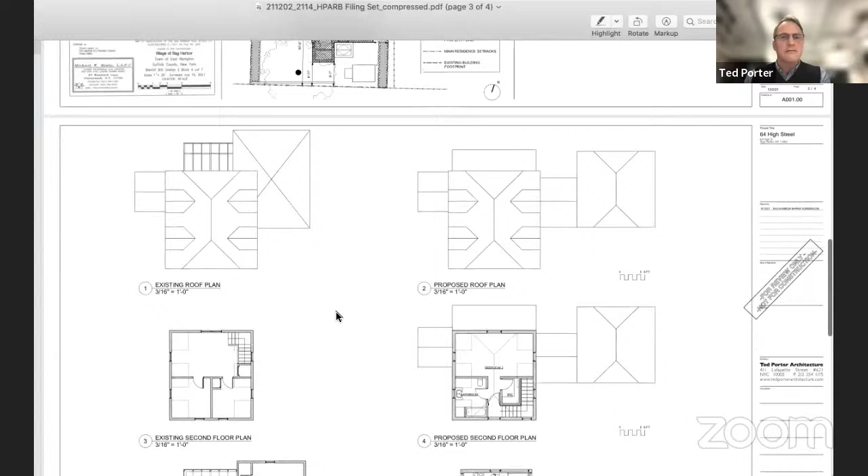Can you see the roof plan now? Yes, okay good. So where's our first floor plan? Here we go. The existing plans are on the left, our proposed plans are on the right.

You would walk along the side of the house. There's a connector here you would enter, and either go to this side to the living room and dining room, or this side to the kitchen and primary bedroom with bathroom and accessory stuff. Then there's a stairway that goes down into the small existing basement, and a stairway that goes up to a bedroom, bathroom, and closet upstairs.

Then the exterior of the house—we've basically kept this form in all its particulars except changing the windows, and added a similar form with the same roof pitch to the front.

This is the side of the house that faces the neighbor who's fairly close, so we kept the windows small, and there's a very tall hedge along here. Then this is the south back side of the house.

This is the side of the house that faces 58 High Street, the neighboring property, also owned by these clients. So they were very concerned that there be a kind of relationship between the two houses, even though they are in no way connected lot-wise. Any questions?

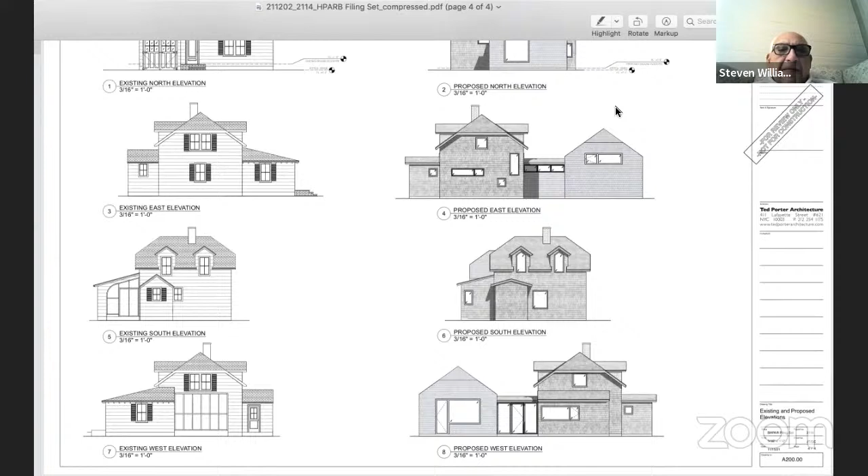Is the north elevation that you're showing us the one that faces High Street? Yes, it is. Can you center that again, please? Right there, right there.

So where do you get into the house? On the side. You would park—can you see the site plan now?—and there's just a walkway along this side of the house, past a terrace, into a doorway that connects the two pieces of the house.

Got it. And then all of this would just be lawn in the front, as it is today? Yes, except that currently there is about a 12-foot asphalt driveway taking up a lot of it. And you plan to remove that driveway?

Yes, we do. And the garage—it comes up to a garage, correct? It does. So that garage will be gone? Well, that's part of the existing house that we're keeping, but it won't be a garage. It's basically the stairway now that will go up to the second floor. Oh, I see, I understand, I got you.

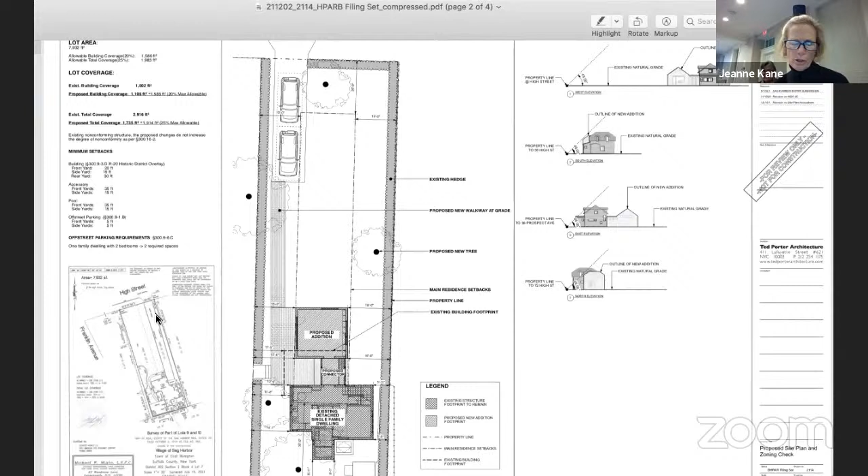So by taking the garage out but keeping the footprint, that allows that space to be used as part of the single family dwelling. Is that correct? Correct, because as of right, if our clients stretched the house all the way up that 20 feet, they could build about a 2,560 square foot house. But the house we're proposing only has 1,400 square feet.

Right, okay. I'm sorry, Mr. Williams, were you going to ask something? Yeah, I was just going to say, my only concern is I think that virtually blank facade facing the street is not consistent with the rest of the neighborhood. It's just a blank wall in comparison to what's common with entries.

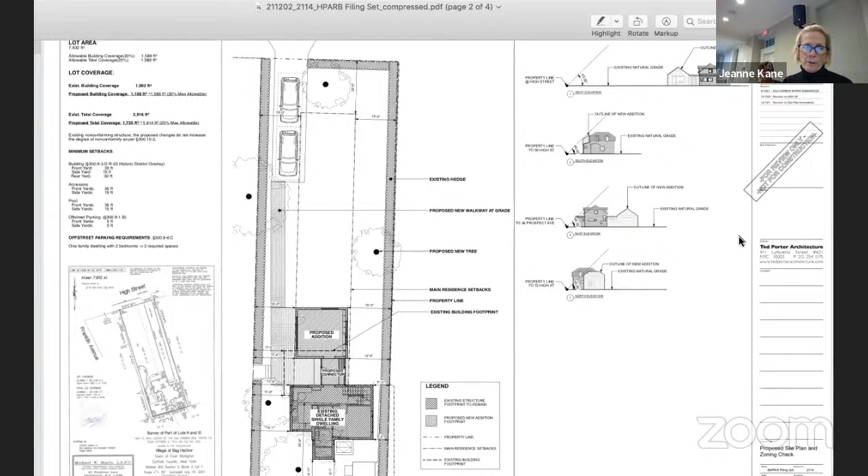Understanding the use for it, I can understand the utility of this design. My suggestion would be if you could put a doorway, folding doors so that they could open or exit in that direction, so it would look like an entry even though it wasn't used. That's my only comment. I just think that the blank wall is kind of stark. Yeah, I think actually that's a good suggestion, or at a minimum, have some trees or some kind of coverage.

Well, I appreciate the suggestion. I just want to make it clear, when you look at this elevation, the proposed north elevation, it's only the 20-foot part that's coming forward. And so a good third of that elevation is that window. So I appreciate your comment about it not being a door, but it's not a blank wall.

I don't want it to be read as a blank wall. Well, but it's just a window. It's a window, yes, and a blank wall. So I think, to have some harmony with all the other homes on the street, where you more typically are going to see a front door, which was there, or a garage door, which was there, some form of entry.

If you could think about some other options that would have it look that way, even if you don't use it. Even a pair of windows symmetrically placed on that wall would be more consistent with the architecture on the street than one big square, asymmetrically located window, which is quite modern and interesting, but quite different from what's next door.

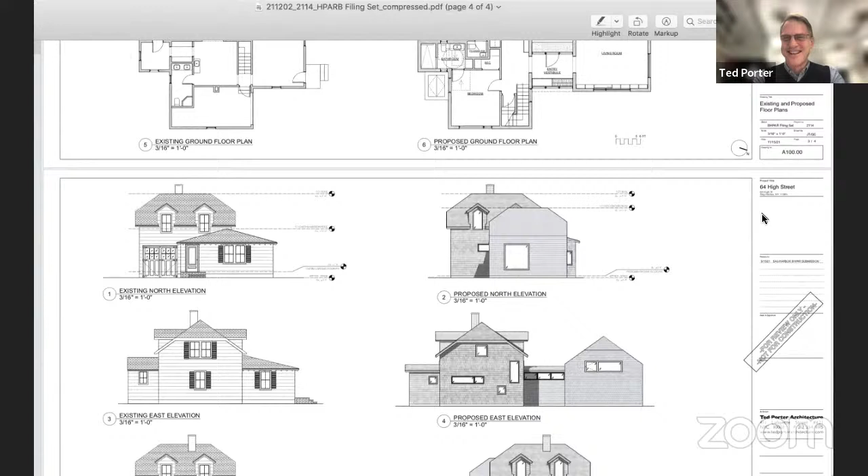Even as a compromise, if that window was centered, but the off-center is kind of... and the size of it. I think I'm liking the suggestion of more trees more. Well, let's see what you come up with.

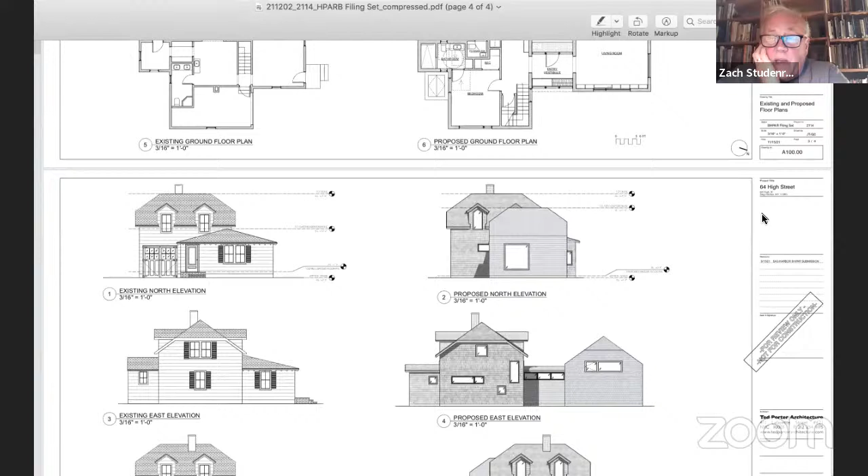So why don't you toss it around and think about if you could have an entry, or a make-believe entry, a faux entry, whatever the proper terminology is. Zach, you can help me with that. Well, that could be French doors and they wouldn't have to lead to anything. Yeah, that would be actually a great idea. Even if there was some sort of a terrace or something outside of that, behind some trees. Right, absolutely. Or you could always paint a mural that had an entrance on it.

All right, so Mr. Porter, we're giving you different ideas so you can understand what we're asking you to try to accomplish, with us completely understanding the width that you're working with and trying to maximize the living space, even though it's still a very modest house. But it allows you to use the existing footprint to have it be as wide as it possibly can, and as close to the neighbors.

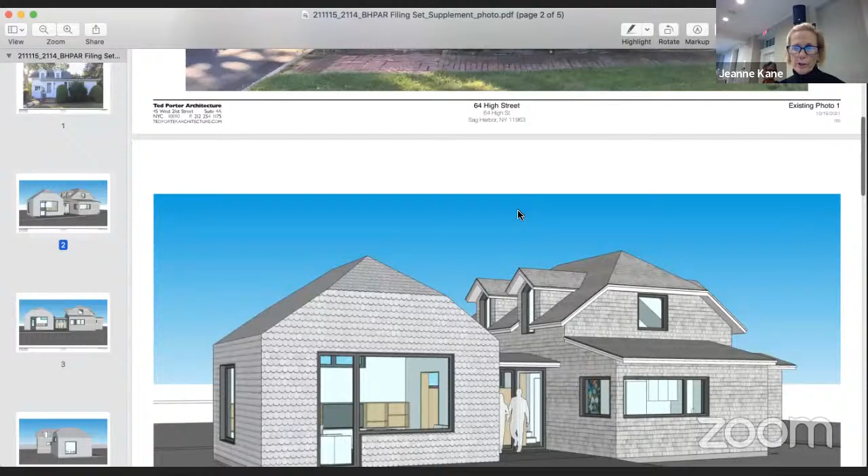Oh, could we stay on that picture for a minute? I wanted to comment on the fact that the original house has these overhanging eaves and roof lines that go beyond the wall, but the new structure has no overhangs at all, and looks a little bit stark to me that way. It would soften the look if they had a bit of eave and overhang. Definitely a modern detail.

I think it's an interesting architectural issue. Our strongly held idea is that rather than bulldoze the old house, which, given that it's not a contributing structure, would be one approach we could take, we don't want to do that. We want to make it better.

It's currently covered in white asbestos shingles, and it just doesn't look appropriate to the neighborhood, living across the street. So by putting wood shingles on it, we think we've helped resolve it into the neighborhood, or contextualize it.

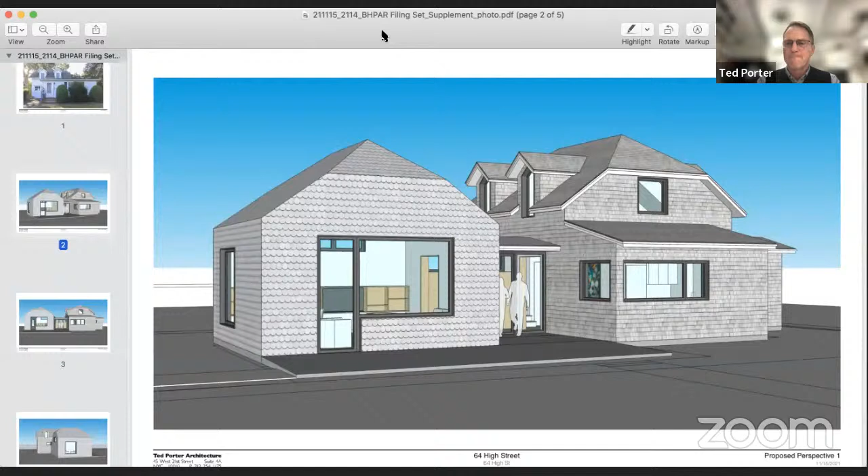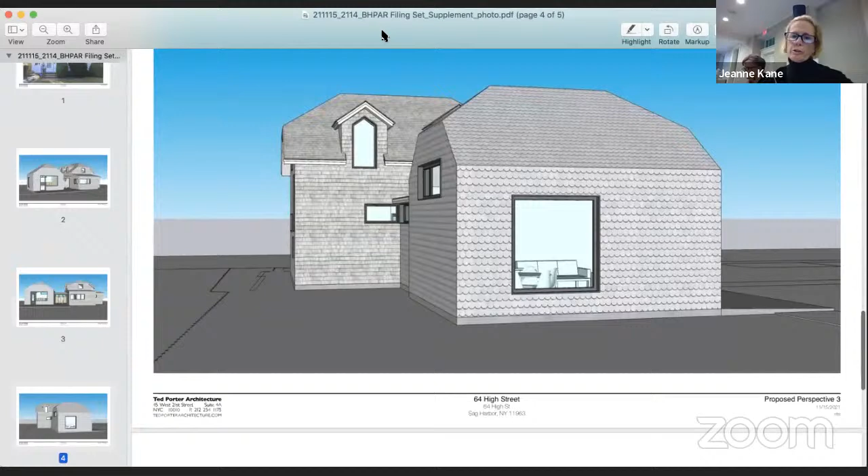Okay, so I just want to be clear, would it be an asphalt roof on top? Oh no, that's shingles, wood shingles as well. It's all wood shingles. Got it, just couldn't tell exactly from the rendering.

Just to follow up on your points, you're saying that for relocating a window or putting in a secondary or tertiary access door, whether it's functional or not, you'd prefer to tear everything down and start again? Oh no, I wasn't saying that. I thought you mentioned bulldozers and stuff. No.

I said I preferred the tree option that was suggested. You did use the word 'razing' somewhere in your sentence, but maybe I got confused. That was an option he mentioned, but then he chose not to do that. Oh, okay, all right.

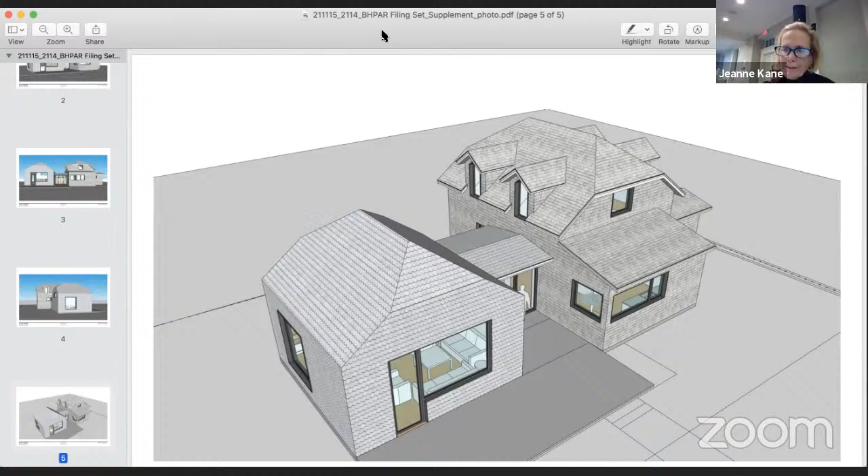Okay, so I would say, Mr. Porter, if you could think about some of the suggestions that were made. We understand what you're trying to accomplish, and we would look forward to seeing what you bring back. December 23rd is our next meeting.

So the basic layout, just to give me more guidance, the basic layout of the volumes is okay. It's the detailing of them and the fenestration, more the vision from the road, for anyone walking or driving by, that it would be very different.

Not to say that we want everything to look exactly the same by any means, but we would just want it to be where people would expect to see an entrance on the front.

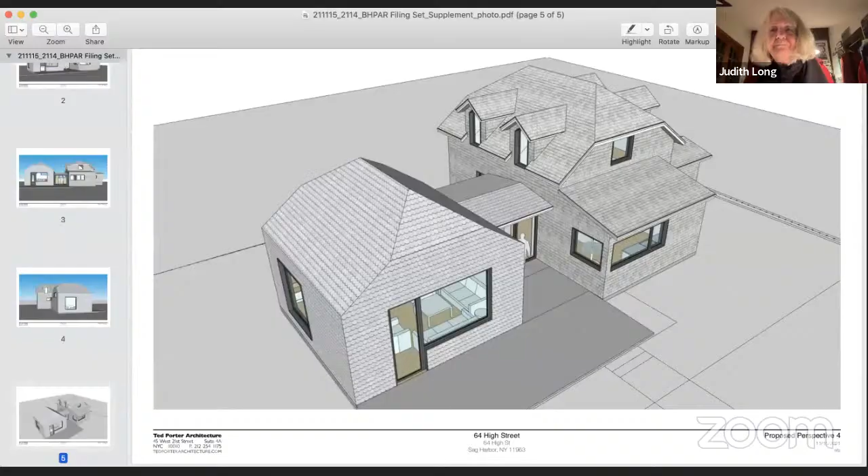Bye-bye. Christian and I will do it the 23rd, and then he'll be done, and then we'll rotate.